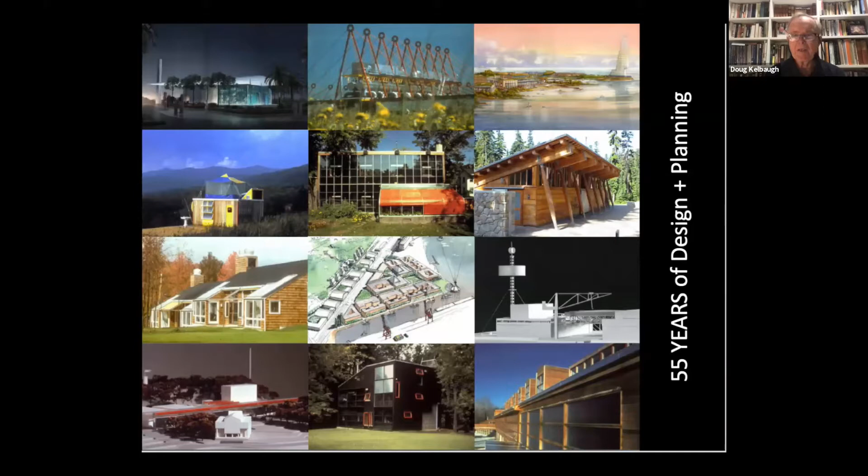So my talk today is based on this book, my latest book, and it goes back to this solar house designed in 1973 in Princeton, a passive solar trombe wall house, and also it's based on a half-century of work designing and building projects around the country and in some abroad.

So we're going to talk about cities today because they are the focus of so many of our challenges and opportunities, from housing and homelessness to community and livability, and other issues listed in between there. The built environment, especially the city, is society's biggest economic investment. We spend more money on that than on healthcare or defense. It's also one of humanity's most empowering and monumental achievements.

And you may ask, why is it so relevant now? Here are 3 reasons it's critical at this moment. One is there's a global tsunami of urban development, as you know, all over Asia in particular, but also Europe and Africa. The world is urbanizing fast. It's becoming more and more a planet in which people live in urbanized areas. Europe is, of course, much more urbanized than Africa, or in fact, than North America, where we both live.

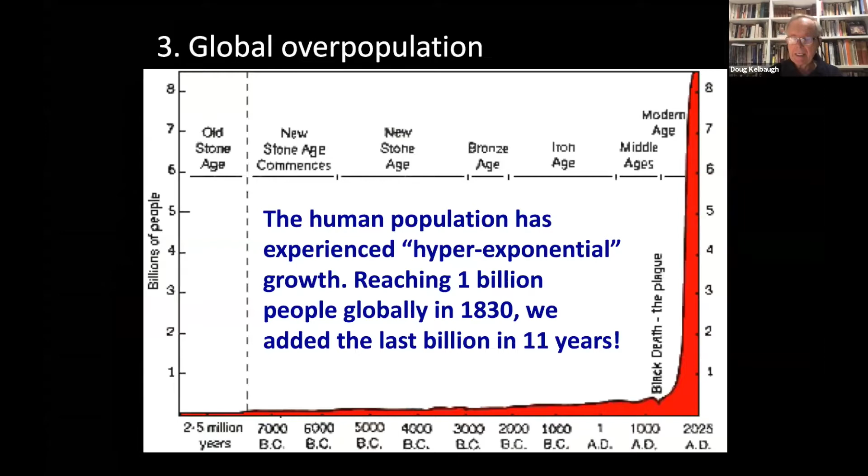Global population, or overpopulation, I would argue, is the third reason cities are so relevant now. The population of humans has exploded. As a species, it's been hyper exponential. It took the planet until 1830 to hit 1 billion, and we added the last billion in just 11 years. So it's literally exploding. 50 years from now, depending on how fast the rate of growth is and on climate change, up to 3.5 billion people could be living in places so hot that today they would be considered uninhabitable. And Africa will certainly be on the front line.

My generation will do fine. We're old, but our kids and our grandkids will go through very different lives that will not be, in the end, very tolerable.

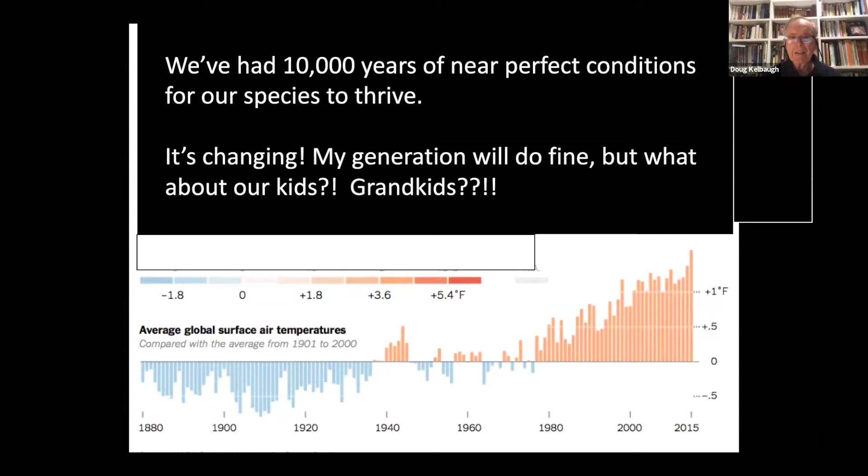So here's a slide that shows the atmospheric carbon dioxide cycle over 400,000 years or so. It goes up and then it goes down, up and down, hot and cold, and then it cools off. But in fact, the CO2 level on the far right there is much higher than it's ever been before.

So this is why President Trump is wrong when he says, don't worry, it's going to cool down. It's not going to cool down, at least not for a very long time, because of greenhouse gases in the air.

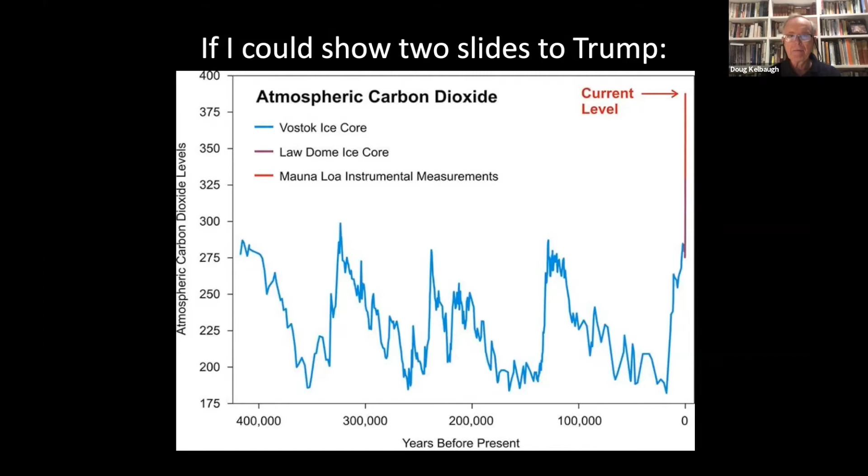Restraining average global temperature to 1.5 degrees Celsius above the pre-industrial period, which is what the UN is hoping we can do, would be less costly by at least a factor of 4 or 5 than the damage due to inaction on global climate change. So it's much more expensive not to act than to act, although acting is going to get increasingly costly.

So the city is not analogous to an ecosystem. It is an ecosystem. It's just as natural as a colony of prairie dogs or a beehive or a bird nest.

Like ecosystems, cities don't have to die. All organisms die, every organism dies, but not an ecosystem. It can live on and on, as cities like Athens, Rome, and Beijing, and Cairo in Africa, certainly Rome, as all Europeans know, goes way back many millennia.

Now we're going to shift gears to something called the environmental paradox of cities. Stick with me, it's a little complex, but when people cluster, when they live in dense mixed-use cities rather than in sprawl, suburbia, they have a small ecological footprint.

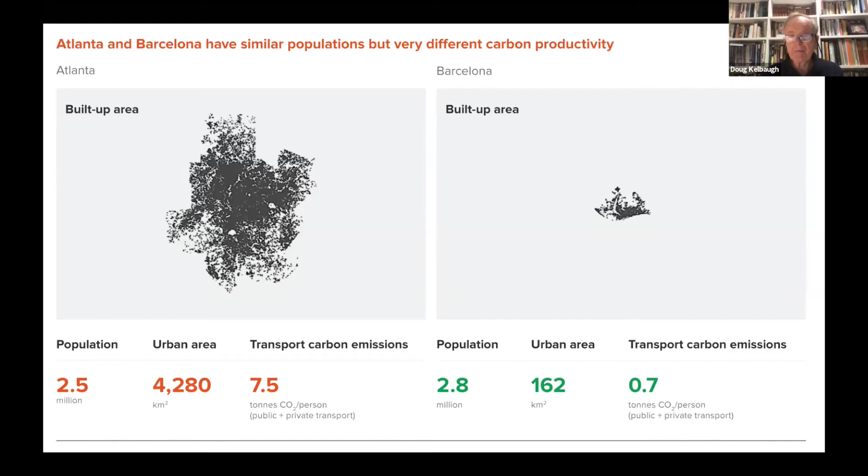It's quite dramatic. Here we compare Atlanta, Georgia to Barcelona in Europe. You can see how big Atlanta is in area compared to Barcelona on the right. They're both about 2.5 million people. Barcelona is actually a few more than that. The urban area is vastly different, but relevant to today. The transportation carbon emissions, greenhouse gases from moving around, are 10 times greater in Atlanta than in Barcelona. This is because Barcelona is more compact, more walkable, bikeable, and has good transit.

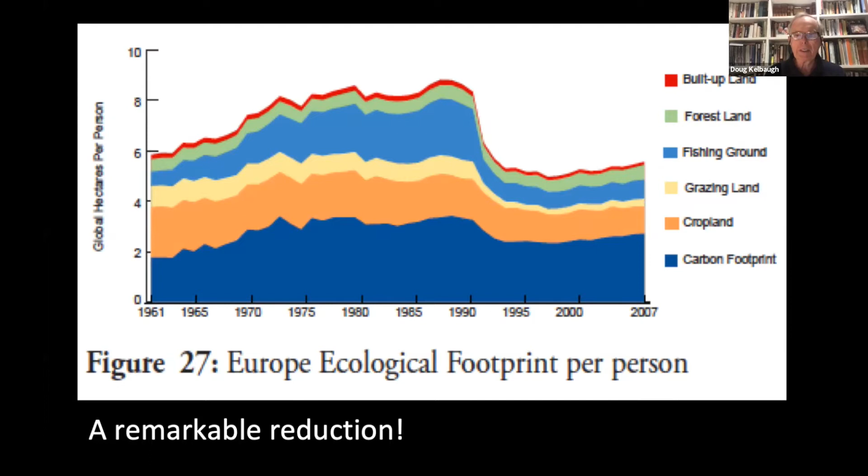Europe has done a great job at decreasing its ecological footprint. You can see in the 1990s how dramatically it dropped for lots of reasons. Blue, the bottom blue, is carbon dioxide, but the other things were improved as well. It is true that there were some countries that dropped out of the EU that year, that decade, so it's a little more complicated than that, but it's a remarkable reduction that Europe should be very proud of.

Africa is the most undeveloped continent. It's also the second largest continent. It's huge. It's expected to add 1 billion people. At one point, the UN was saying 2 billion. I find that hard to believe, but it's a lot of people that are being born. The population of the planet may peak at 9 or 10 billion. I don't know if the ecosystem will support that many people. It's quite possible there'll be a die-off at some point. But in any case,

Africa is exploding in these large, hot cities. Unfortunately, the massive poverty and disease is part of that explosion. But ironically, in these international surveys done by the UN, Africans are always rating themselves the most optimistic people on the planet. They're very upbeat with a great attitude.

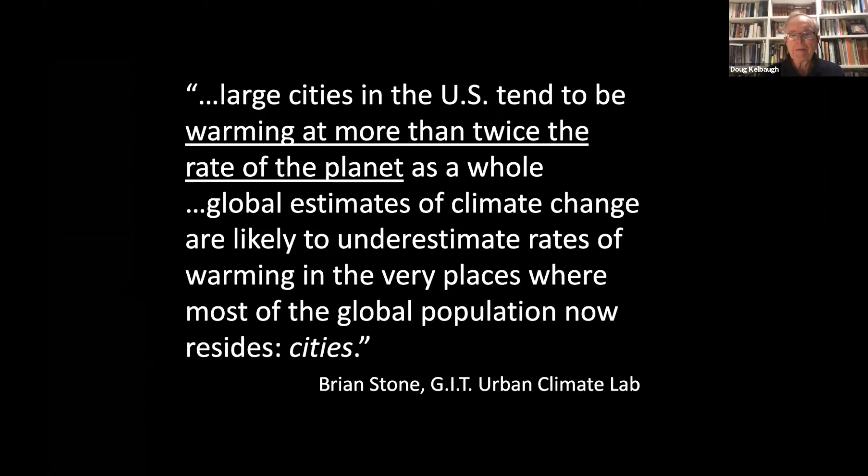On the other hand, we're very lucky. Strategies to mitigate and adapt to the urban heat islands of the planet are consistent, in fact identical, with strategies to deal with climate change. So when we're dealing with urban heat islands, we're dealing with climate change.

And I argue in my book that because urban heat islands are manageable in a much shorter time, you can cool your city down in 5 to 10 years rather than the 50 to maybe 100 years it'll take to stop climate change — well, we're not going to stop it, but to slow it down anyway. There's more immediate and more palpable feedback by addressing urban heat islands, and I think that better motivates people to change their behavior.

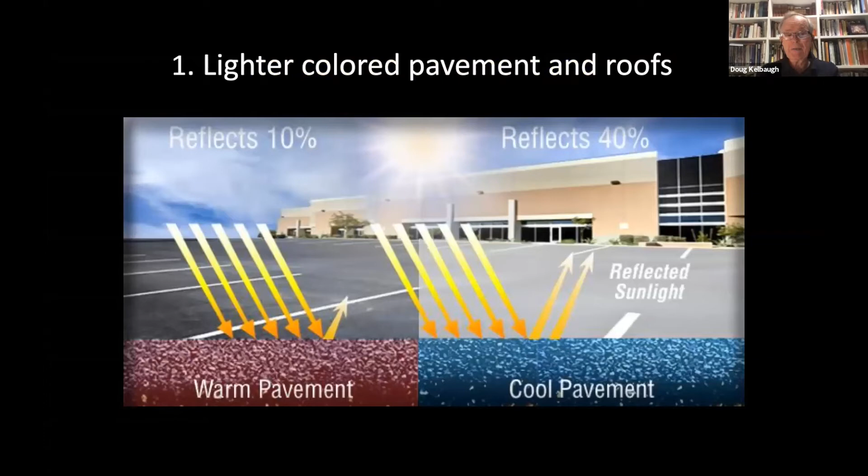And how do we cool down urban heat islands? Well, lighter colored pavements make a huge difference. A lighter pavement can be 4 times cooler than a dark pavement. And that's true of rooftops as well.

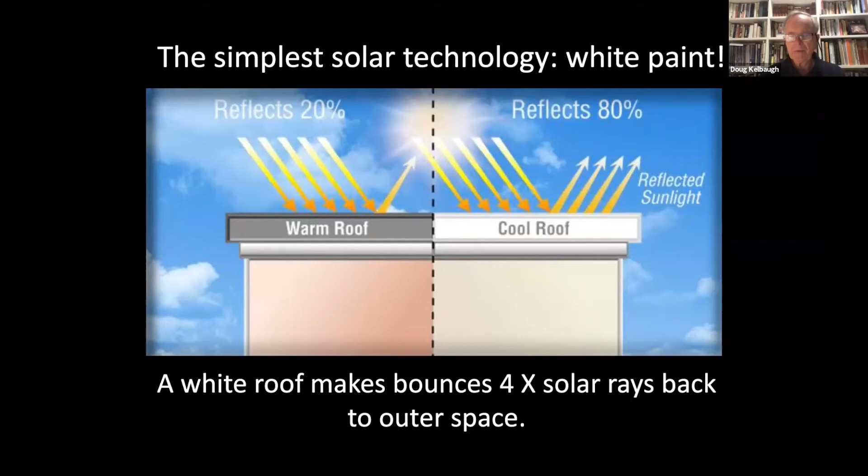The simplest solar technology, which makes sense in Africa and Europe, is simply painting a roof white. It will reflect up to 4 times as much solar energy back into the sky as a dark roof, and as you know, many roofs tend to be dark.

Green roofs, those that actually grow grass or plants on top, including edible food, are wonderful in hot climates. They do a good job of not only cooling the building, but white roofs are not only cheaper, they're actually more effective at countering climate change than green roofs.

So you've got about 5 minutes. There are other good reasons to do green roofs, but white roofs are technically more effective.

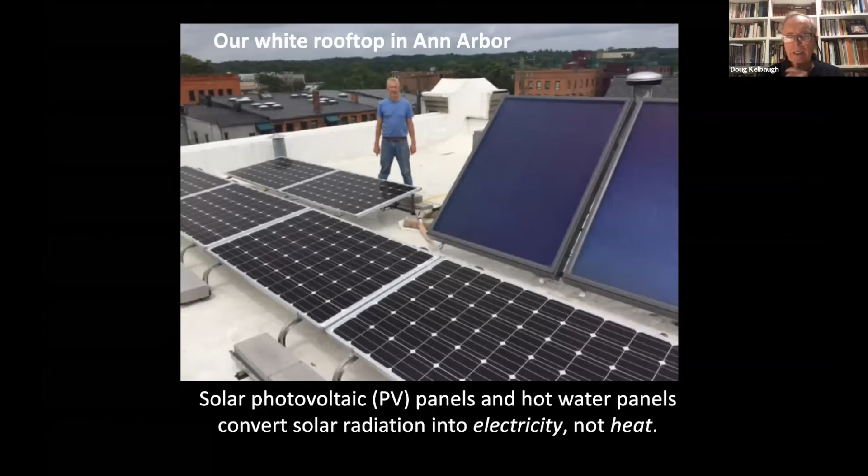This is the white rooftop of the condominium in which we lived in Michigan till we recently moved to Seattle. You can see it's a white roof, and then there are photovoltaic collectors in the foreground which are making electricity, and the tilted collectors are producing hot domestic water, meaning we have to burn less gas to heat water. Very effective, and we could sell back the excess solar energy in the summer to our utility in what's called reverse metering.

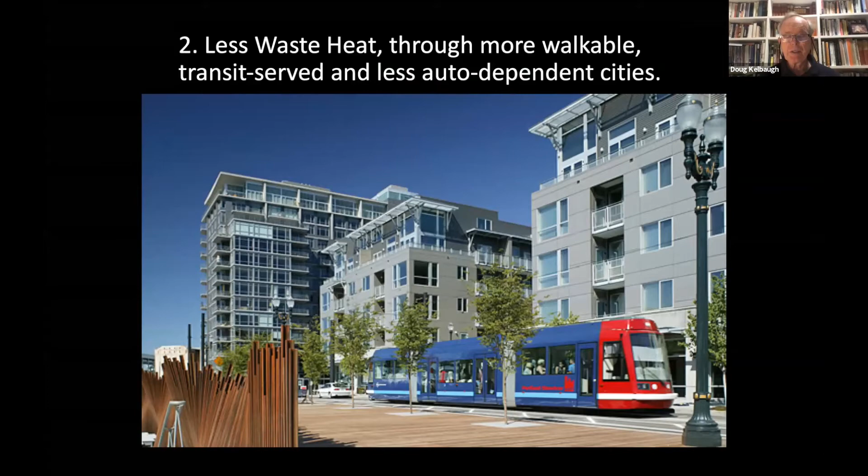Another way to reduce heat islands is less waste heat from vehicles. More walkable, transit-served, less auto-dependent cities address that issue.

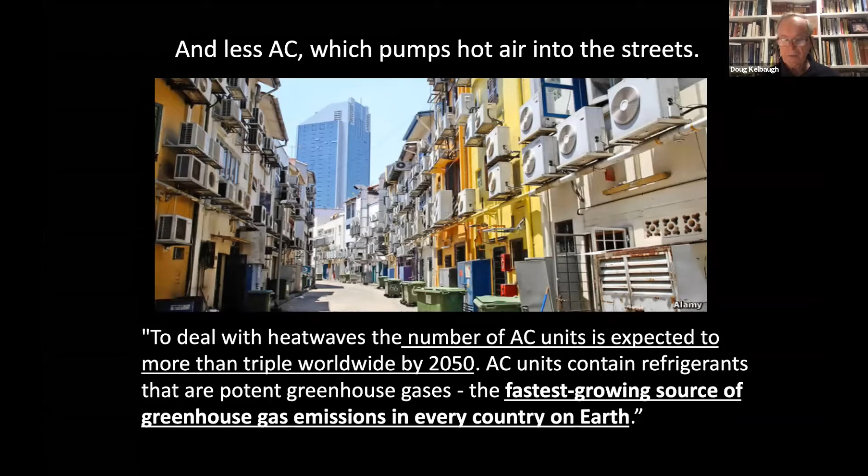This is a bigger and bigger deal in Africa, where there are more and more air conditioners, and they really are city heaters. They may cool off interior space, but they heat up the street and the city's air. To deal with heat waves, the number of AC units is expected to more than triple worldwide by 2050. I hope this doesn't happen, because AC units contain potent greenhouse gases in the actual chemicals within the unit. Air conditioners are the fastest growing source of greenhouse gases in every country on Earth, including Europe.

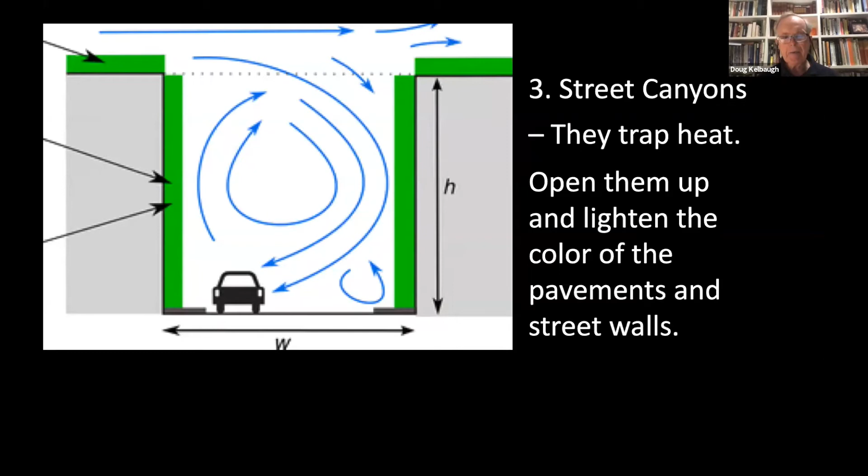Then there's street canyons, which trap heat in cities. We need to make them wider and not so tall. Manhattan is the worst example, but there are many narrow streets in Europe that get hot too. We need lighter pavements, but also lighter colored surfaces on the walls of those canyons.

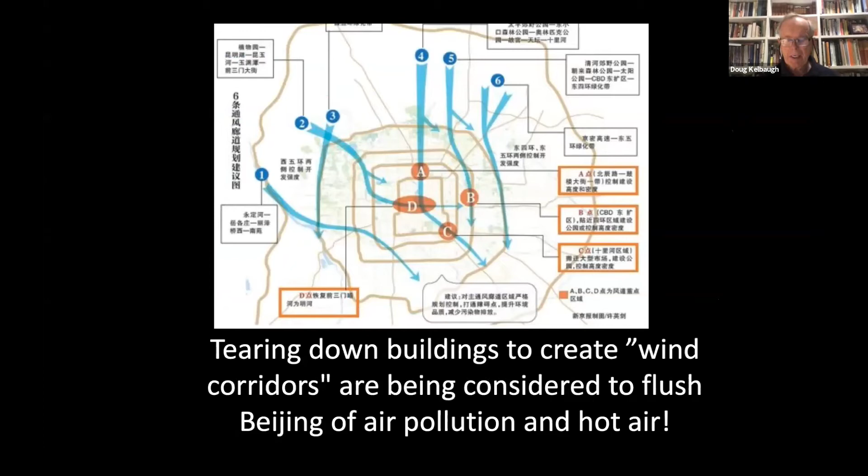It's actually getting so hot in some cities. Here we are in Beijing. They're talking about tearing down taller buildings to get more air circulating through the city, flushing out dirty air and hot air.

Lastly, cool microclimates, particularly trees that shade and filter and cool the air, are the way to deal with urban heat islands. Trees are the great multitaskers. Look at all the wonderful things they do, from beautifying the city to providing fragrance and places for birds. They produce oxygen and sequester CO2, and they even reduce crime and increase real estate values. They are the win-win-win species on the planet.

Because urban trees grow bigger, they can form a sort of cathedral-like space in cities. They grow so much bigger than trees in the countryside, which are competing and much more closely planted to each other. They're up to 16 times more effective at mitigating climate change than non-urban trees.

So what do we need to do? We need to eat plant-based diets. We need to avoid air travel. We need to live car-free and have fewer children. You should eat locally and compost your waste food, and replace a conventional car if you can with an electric bike or electric car, and wash your clothes with cold water and hang them outside.

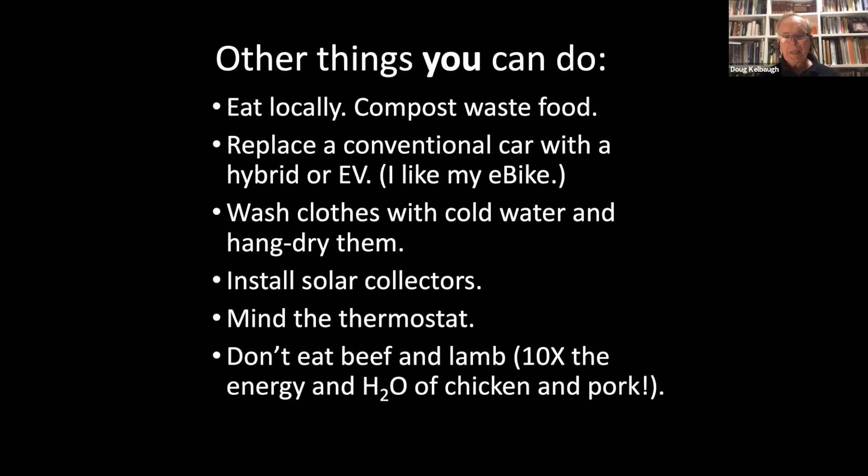Install solar collectors on your roof or on the side of your building, and be careful with the thermostat, minding it to cut down energy use. And don't eat beef and lamb. They take 10 times the amount of water and energy to produce a calorie of beef than, say, chicken or pork.

Now, here's the little miracle that shows we still have more than our share of good luck. At exactly the same time it became clear we have to stop burning fossil fuels, a wide variety of other technologies for generating energy became available.

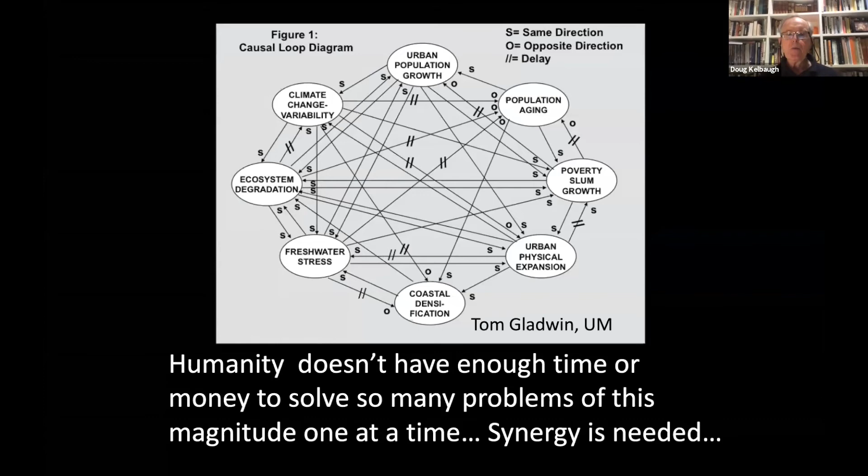We're very blessed. And don't forget to share things in the sharing economy, which has lots of wonderful names. It's a very effective way to deal with climate change, because we don't have time to solve all these problems listed here in the circle by a colleague of mine. We have to be synergetic. We have to deal with multiple problems at once. We can't deal with them one at a time. But while we're dealing with them, don't forget to dance and enjoy yourself.

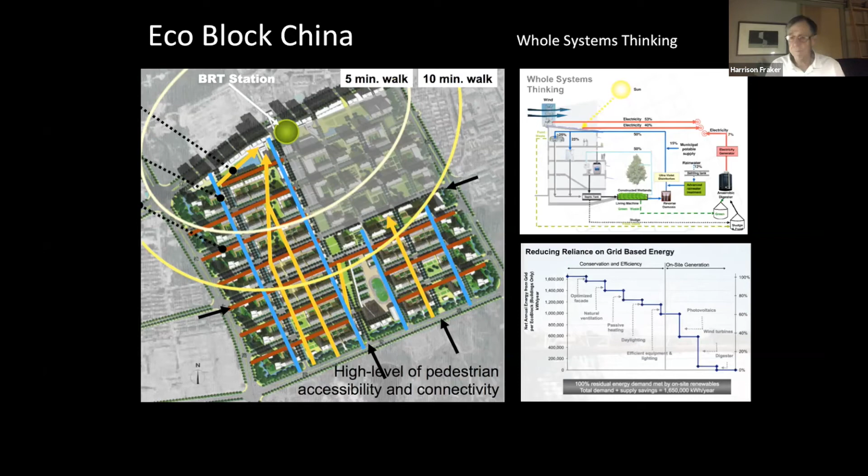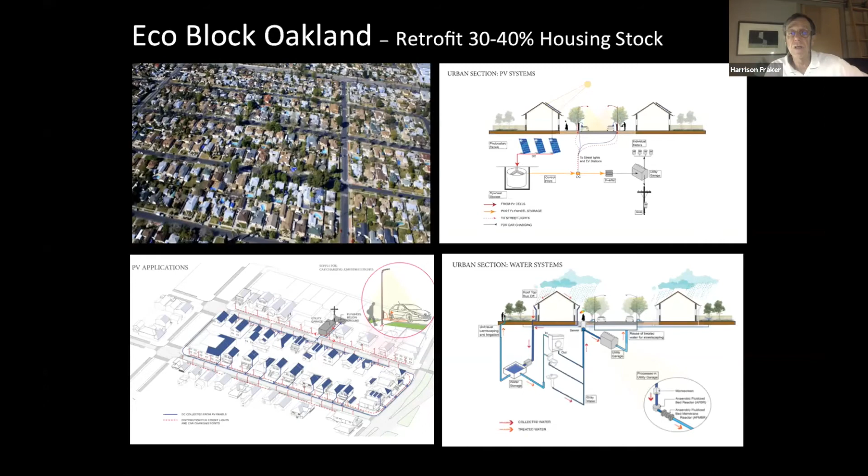You can do the same thing with water by collecting rainwater for potable use, but you can also use treated sewage to remake the microclimate of the street. And what's amazing is the cost of doing this can be covered from the savings on your existing water and utility bills, and especially the miles you've now done electrically.

I looked at first generation systems for how to sustainably power developments. In Bo01 in Sweden, wind and groundwater heat pump provided 100% sustainability. In Hammarby, also Sweden, they used combustible waste to energy, providing 25% of the demand. In Kronsberg, they used wind and cogeneration to provide 50% renewable energy. And in Vauban, passive solar, efficient PVs and organic cogeneration achieved 100%.

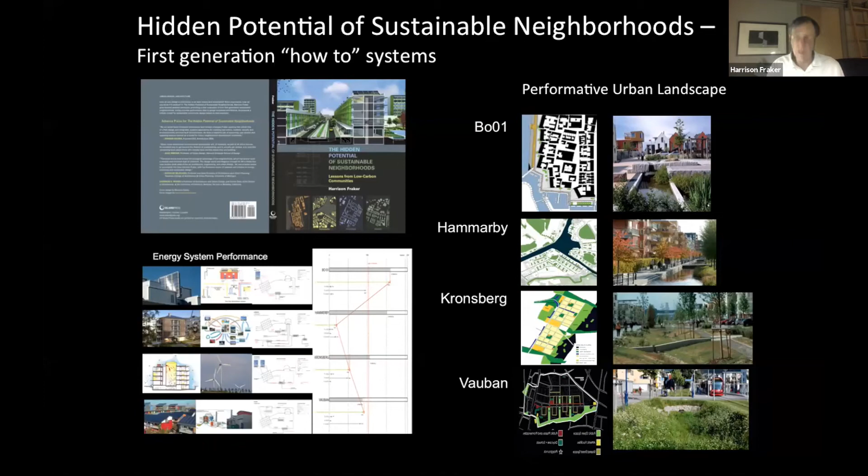But the big discovery in these places was how spectacular the urban landscape was in treating stormwater, enhancing the microclimate, and the aesthetic impact. This points to the potential in urban design for sustainable systems to actually touch the sensorial and aesthetic potential of creating better places.

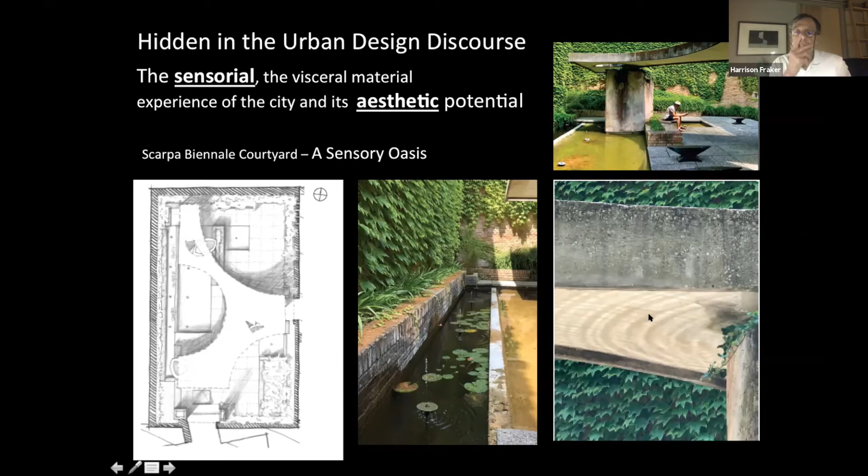Scarpa's Biennale Courtyard is an amazing sensory oasis where you have sun and shade, a microclimate with evaporative cooling and evapotranspiration, and then smell and sound. These water lilies are copper water lilies that tinkle, but they reflect their rings on the soffits. This is an oasis of sensory delight.

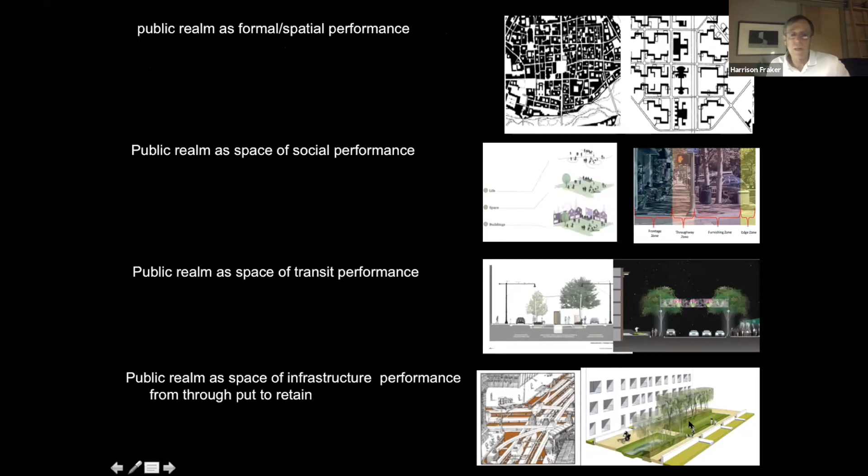The problem is that urban design has, in some cases, focused on the public realm as a figure-ground space, formal spatial performance, or social performance. Think of Jan Gehl—the public realm as the place for all forms of transportation, and also as the space of infrastructure performance, where we've tried to hide it and get rid of it, when in fact we can retain it and make it part of the space.

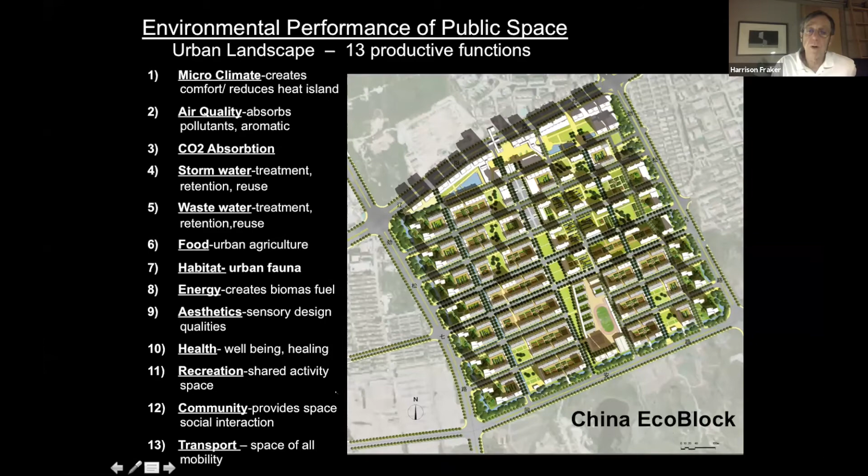When you look at the environmental performance of public space, just like Doug's trees, it turns out that the first ten on this list—microclimate, air quality, CO2 absorption, stormwater treatment, wastewater treatment, food, habitat, energy creation, aesthetics and health—are all underdeveloped. We've usually used public space for transportation, all modes, and for social interaction in plazas and parks for recreation. But streets have a huge underdeveloped potential for environmental performance.

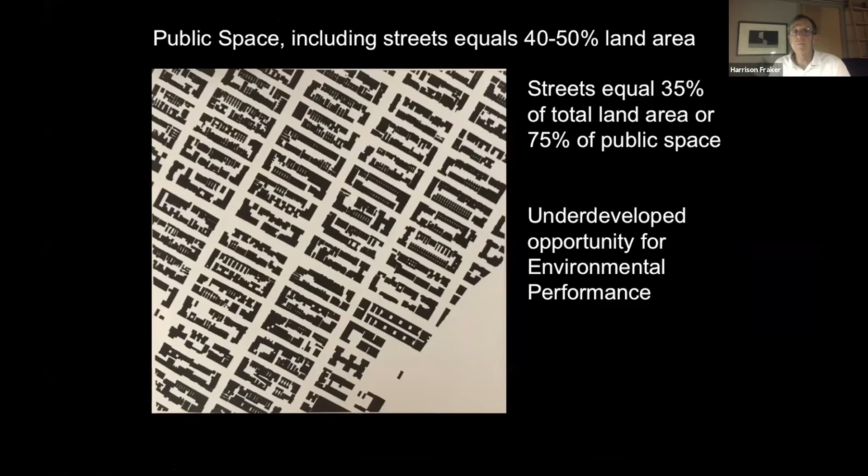Streets equal 35% of the total land area, 75% of public space. If you look at the environmental section, rather than just the plan, it is the space of environmental performance, but it's been a dumping ground—waste heat from air conditioners like you saw in Doug's pictures, all the light and sunlight reflected increasing the urban heat island, and waste from vehicles.

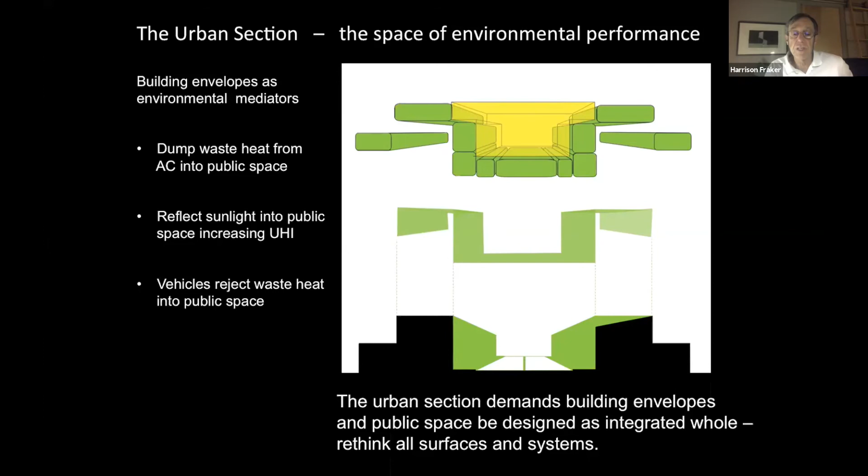The urban section, though, demands that building envelopes, public space, and transportation be designed as an integrated whole. We need to rethink all the surfaces and systems. I'm going to roar through these.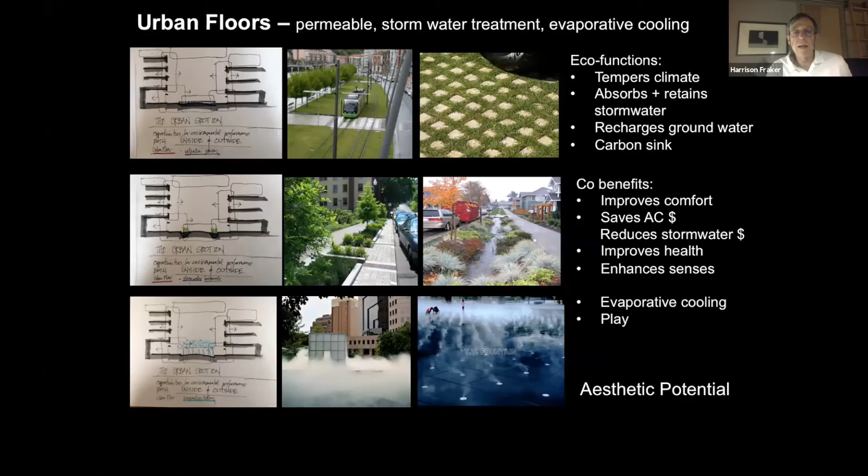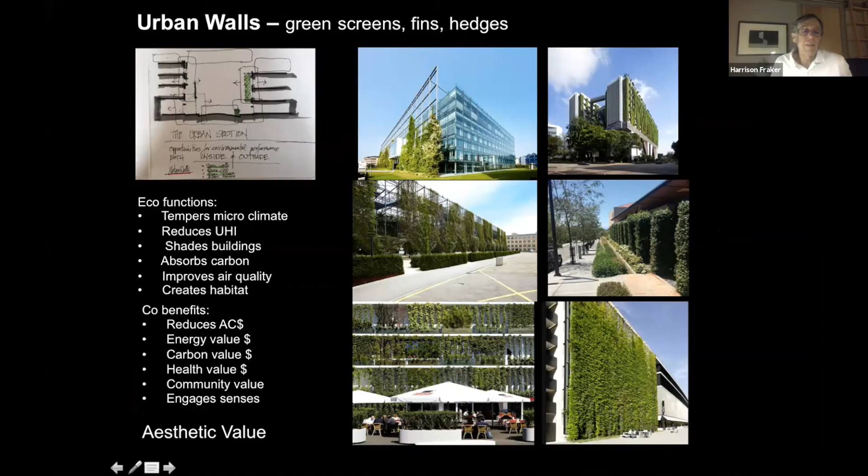Same with urban walls—these are green walls where you can have urban screens, separate structures. You can have green fins, green screens, and they do many of the same things.

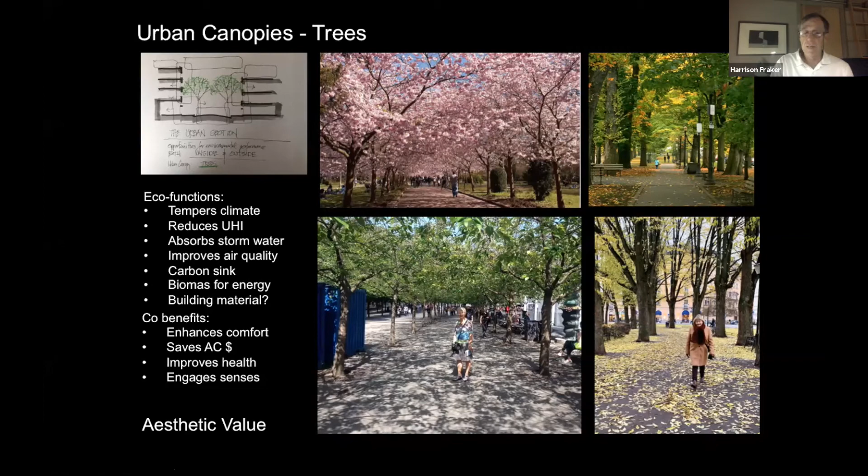Trees, Doug focused on these, but their potential is extraordinary, especially because of their changing qualities—wonderful smell and flower in the spring, dappled light, cathedral spaces, leaves in the fall, sunlight let in. Amazing. But they're not the only way to deal with the heat island effect.

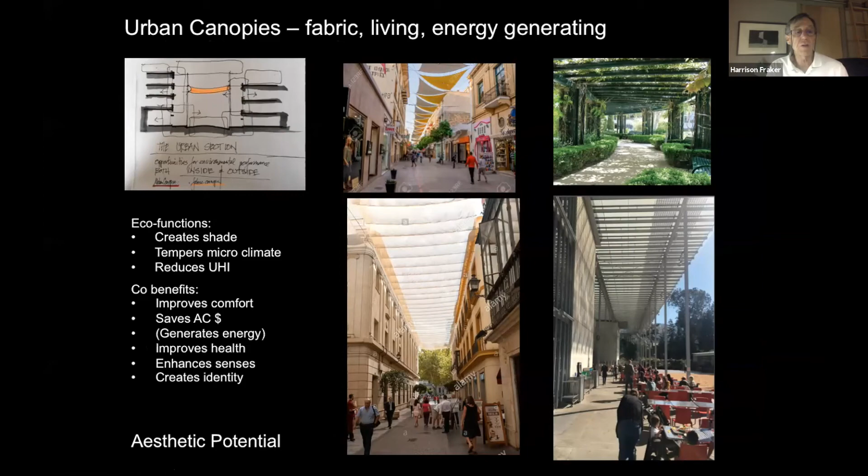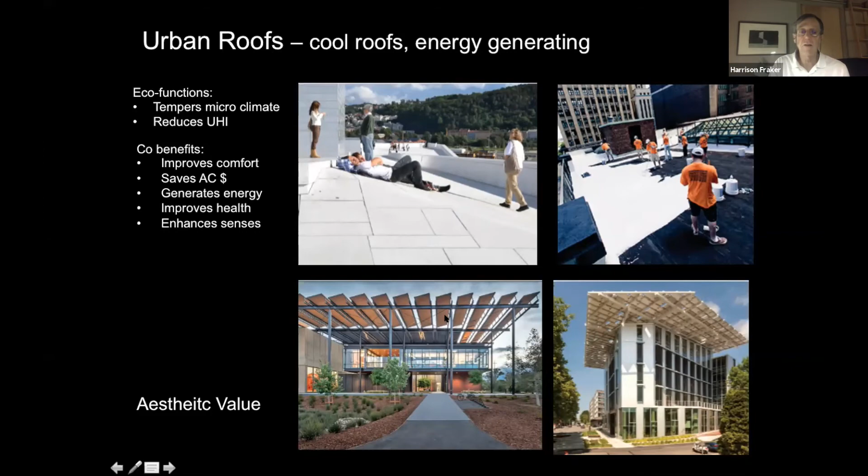You can have fabric awnings, green trellises, and even energy-generating trellises that have all of these eco functions and co-benefits. Doug talked about white roofs—they're wonderful, really inexpensive, and you can even occupy them so they're part of the urban experience, not just reflecting sunlight. But roofs can also generate energy, as you can see in these other photographs.

And then, of course, there are the multi-functions where you can grow food, have a garden, even have a social community up in the air with bridges between things. So it's a new urban ground.

What happens in these places, though, is much more than a technical fix. If you look at Paley Park in New York, which reduces the heat island by 10 to 12 degrees Fahrenheit, we really—as neuroscience has shown us—it is a meaningful place because we empathize with the entry and the room that's been created.

It affords many ways of occupying and sitting. It has amazing environmental performance with shade, evaporative cooling, and evapotranspiration. The sound, the smell of the water wall, the touch of the materials, all of this dappled light really create a memorable and meaningful place beyond just its technical performance. This is a kind of higher-order opportunity that we have in the public space of cities.

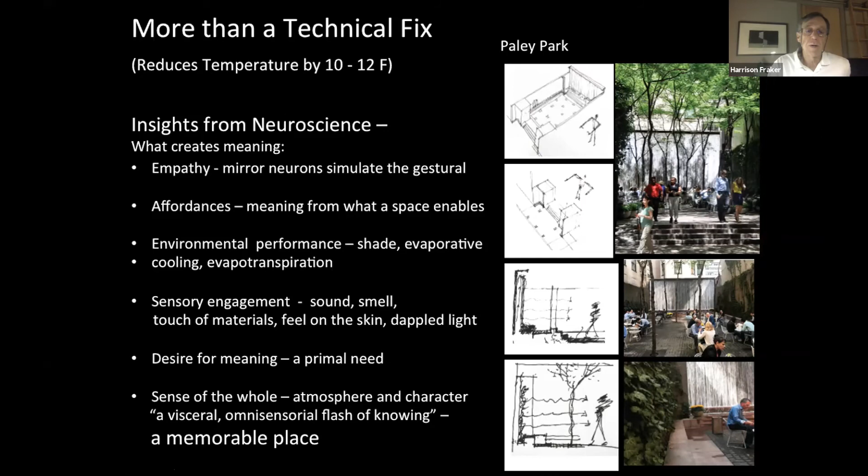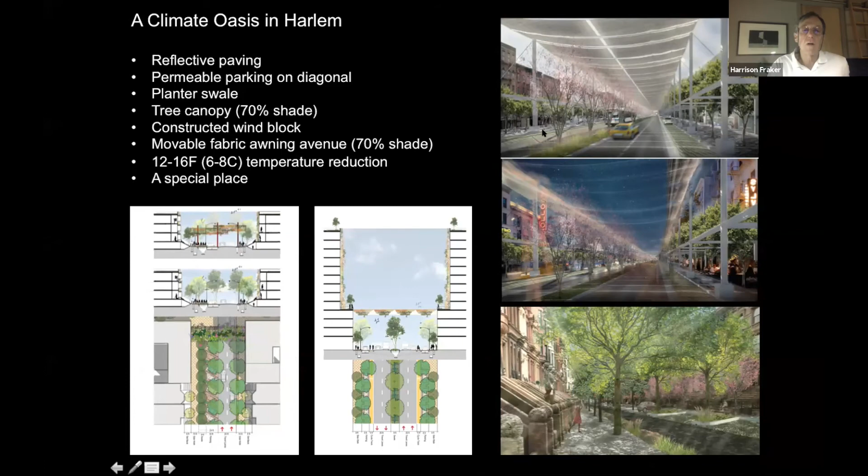So here are a few examples where we took a look at how you might create a climate oasis in Harlem, where you get 70% shade cover on the cross streets, the east-west streets, and then a device to shade the avenues. This is Malcolm X Boulevard in Harlem. Or you can even turn the cross streets in Manhattan into power plants.